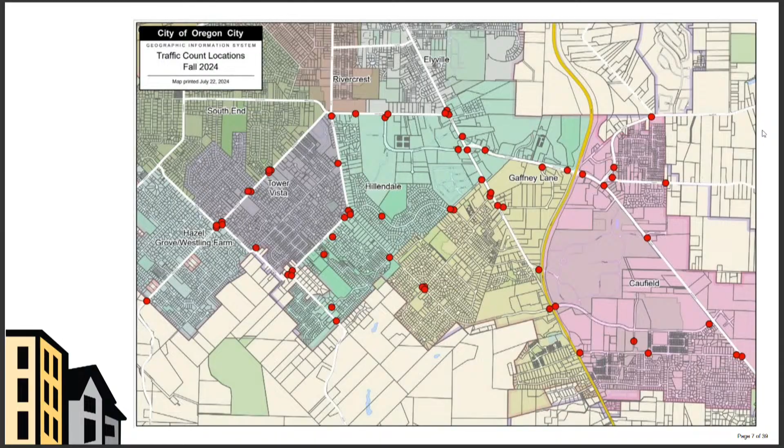Our next topic is the 20 is Plenty program. I didn't pull the long history of this program and the discussions we've had, but I did pull a summary of the June TAC meeting. John was here and shared with you some information.

So back in June, John had a discussion with the city commission, and they essentially approved moving forward to engage the community and evaluate community interest in the program. That's where John came back to you guys at your June meeting, and he shared the following suggestions.

Confirm there's full consensus of the TAC members. Confirm TAC participation in a community outreach and public education campaign if we move forward with this program.

Confirm with the police department the feasibility of enforcement of speed limits on local streets, and a review of a draft community survey. So tonight, what I wanted to share with you guys is...

I'm not sure John had this information at the last meeting, but in October of 2023, we did a community survey about the 20 is Plenty program.

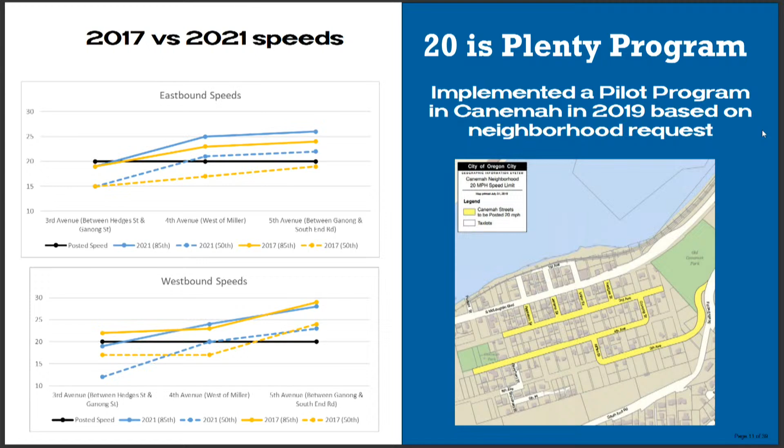I'll just make one comment about these numbers. I've seen some studies and articles about Portland's speed limit, the '20 is Plenty' reaction, and there have been two counts since Portland implemented 20 is Plenty. One of those counts came out in 2021 and another in 2023. There were some articles that came out when their first studies came out in 2021.

Oh my gosh, the speeds actually went up in 2021 — it's a little misleading because people were driving like bats out of hell throughout the pandemic, everywhere, no matter what the speed limits were. It wasn't until 2023 that we saw those average speeds go back down.

And who knows — did 20 is Plenty help with that or not? It's still up for debate, but the fact is, it's a statement of values for us. Do we value people driving at safe speeds on neighborhood streets, or don't we? Is that an expectation that we're willing to set and have the police force enforce if necessary?

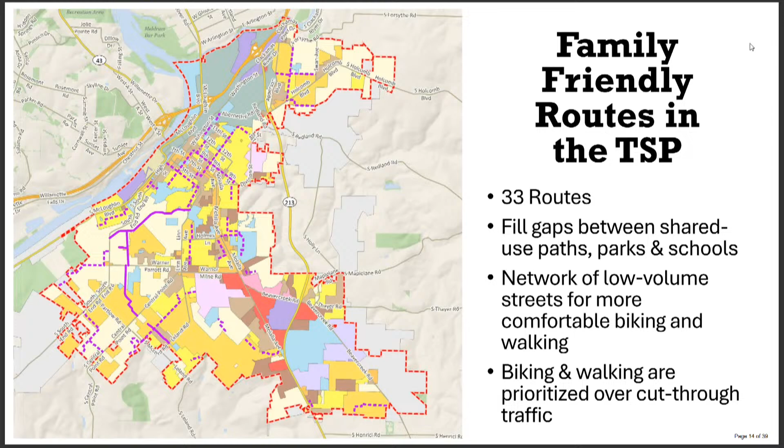So I would be hesitant to say we, and all. I'll disagree with you on that one. Okay, well, so maybe we're at the first checkbox. Yeah, sure.

I guess I'll just speak for myself. I am in favor of moving forward with an expansion. If the consensus is that we just move forward with a smaller expansion at this point, then I will support you all in that. But I just think it's an easier message, and maybe we should go down the line and see how others are feeling about it as well.

So a quick thing, we can discuss this further if everybody wants, but maybe a quick vote of people who are in favor of moving forward to investigate the program and see if there is a consensus there. Would anybody be okay with that?

I don't know if we're ready for a motion. I think we should just kind of go down the line and get a temperature as to what's Petronella feeling. I haven't heard what Henry is feeling like. I haven't heard.

Chris and Tim, you all voted for, we had a unanimous motion to recommend to City Commission that we move forward on 20 is plenty. So if we're no longer supporting that unanimous motion, then I think each of us should individually talk about why it is we're no longer supporting that.

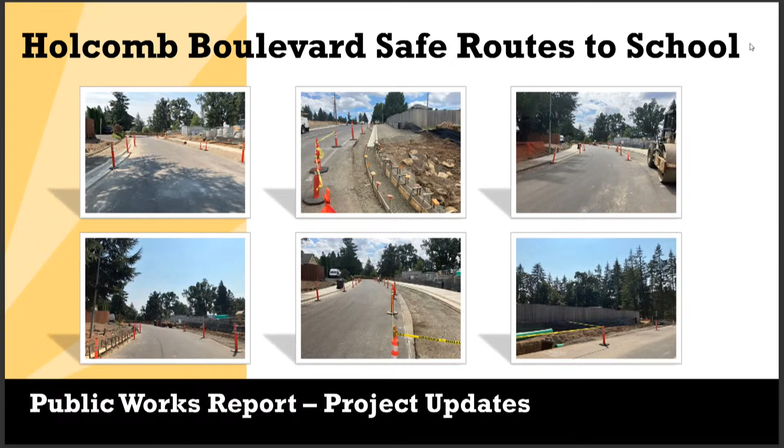Vance: On where Icon's work is going to be in the future, would it be possible to put a temporary blacktop sidewalk across that area so we could have a passageway that wasn't on the street? I just jotted that note down. Again, Henry, I'm not involved in this project. Is that the apron into the Sears project? No, just along the edge, because he presented it like there was going to be a gap in there of grass or something, and I'd like to see it as a hard surface, not permanent, just something. You got it. Perfect. Yep, duly noted, we'll have to look into it again.

My apologies that I'm covering this and don't have those details. I understand. I have a question for you on this. I know Dina will have to be the one to answer this.

We have an epidemic of gophers across this section with construction people constantly cutting the street. Originally it was planned that from the center line to the north they would replace the asphalt, but they've pretty much destroyed the center line to the south side too. They just repaved that new section, and I come back and they've cut it again all the way across the street. These people don't know where their utility lines are running - they keep cutting them, burying them, and cutting them again. Can the city enforce that when they get this all done, they put a complete layer over this so it's not like the Oregon Trail driving through there?

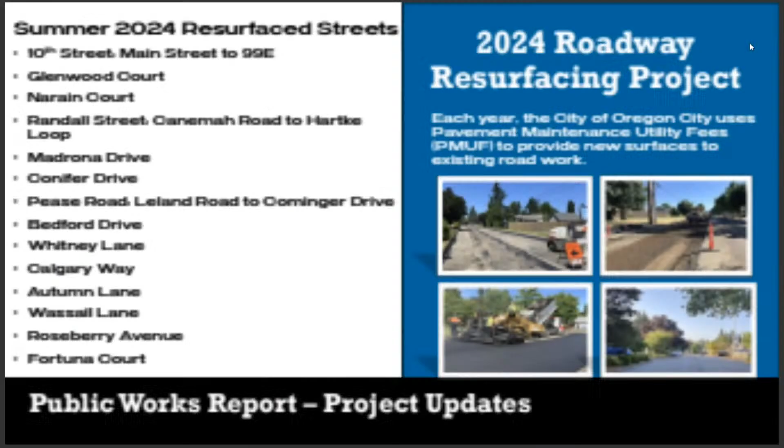Okay, these are our in-house paving projects. The ones we did here in 2024 are at the top of the graph, and the lower part of the graph is what we intend to do in 2025.

I'm very proud of my transportation crew. They get better every year. Paving is something that, like most things, you have to do with great regularity to get better. It's kind of like painting your first room - you do it a few more times and it looks a lot better.

You can see the roads we've tackled on this list. Sometimes it's not the amount of roads but the square footage or yardage and tonnage. We have limitations with the number of trucks, personnel, and the width of our machine, so that's where the private contractor comes in for larger, more technical streets. Typically in-house paving, to be mindful of budget, we avoid overlays that trigger ADA requirements for sidewalk ramp replacement, since several other paving maintenance practices trigger that. We try to target streets that don't have too many sidewalk ramps for in-house work, and leave the rest to the contracted paving program through PMUF.

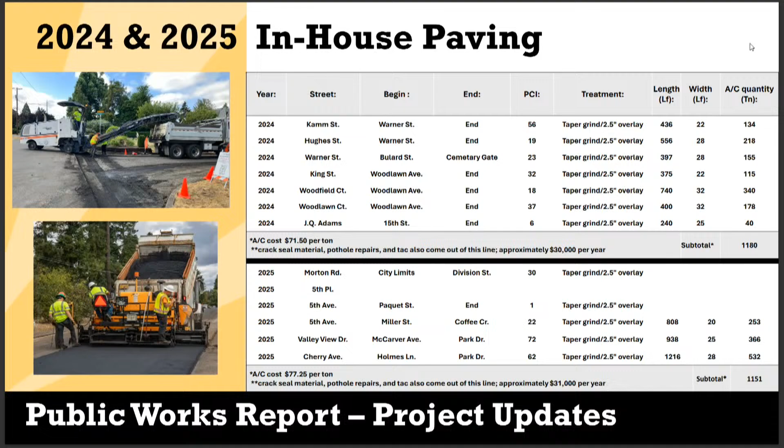So the purpose and need, you can see there, that's the official bullet point, but this all started 20 years ago with the adoption of the McLoughlin Boulevard Enhancement Plan, where we realized we had a highway through our city that was not very friendly to pedestrians, bikes, or even cars. With that adoption of the corridor plan, we've been working on different phased implementation. The first phase was in the middle part, from 10th Street to the I-205 on-ramps, and that's where you see the new trees. We added extra greenery wherever we could find a place. We worked on reducing the speed on McLoughlin Boulevard, asking how can we stop people going 55, 60 miles an hour down McLoughlin and turn it more into an arterial roadway.

The second phase was from Dunes Drive to the Gladstone Bridge, the work right in front of the Oregon City Shopping Center. Phase 3 was the most complicated section, and a couple years ago we applied for a grant to start looking at that complicated section, which involved the viaduct. A viaduct is like a bridge, but rather than spanning an opening between two known land areas, certain portions of 99E are only partially on basalt, so there are areas that are a bridge structure for about three blocks. With that 1940s viaduct, there are crumbling sidewalks, not ADA compliant, and really no ability for bikes.

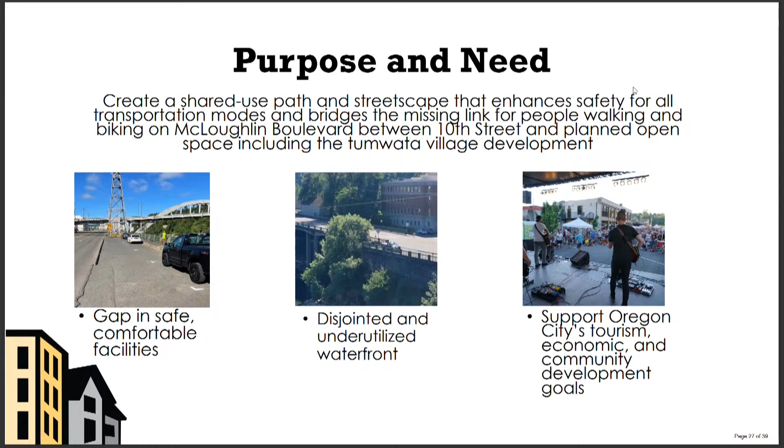So this is the project area. This is phase 3, which is either called Tunnel to 10th, referring to the railroad tunnel, or Tumwata Village to 10th. But you'll see within the boundary, it is McLoughlin Boulevard within that boxed area. The reason Main Street is added to the project area is that whenever you do a good engineering design study, you have to have a no-build option.

So as part of this process, what happens if there is not an option for pedestrians and bikes to safely get along the Willamette River? Then the no-build option would be directing bikes and pedestrians to cross probably at 10th and utilize Main Street as their way through. That would mean sending bikes through sharrows on Main Street and redirecting folks to walk south through Main Street, and really not changing the existing condition of the riverside of the viaduct.

So as part of the planning process this last year, our design team came up with a lot of different options for pedestrian structures on the river. One thing we heard from ODOT is that we could not attach anything onto the structure because of the age of the 1940s viaduct. So anything that was built would have to be its own independently structurally supported structure. You couldn't just put a little add-on and have a pedestrian path.

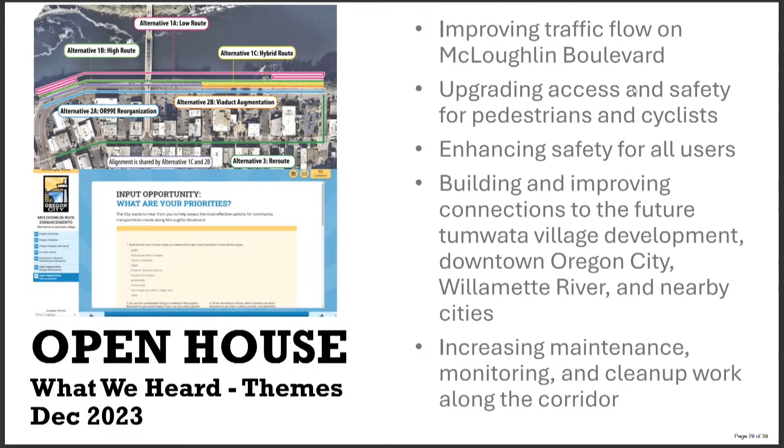And really, the first two phases are done, and this phase has definitely shown what happens when you have an existing condition that hasn't been changed over the years. So we definitely heard that. We sent all that information to our design team, and they started looking at all the alternatives, and pretty quickly they realized that none of the alternatives could structurally be built.

I'll try to talk a little bit about why, and also be permittable. Two options came out of those conversations that were not in the public open house. The design team and the bridge engineers looked at what could be built, as they pushed back and had conversations with our permitting agencies and ODOT, which owns the infrastructure.

One is the conventional viaduct with 2 signature spans. The other was the long span. So the long span is what kind of bubbled up out of the process, really the only viable alternative. I'll talk through their analysis of how they came to that.

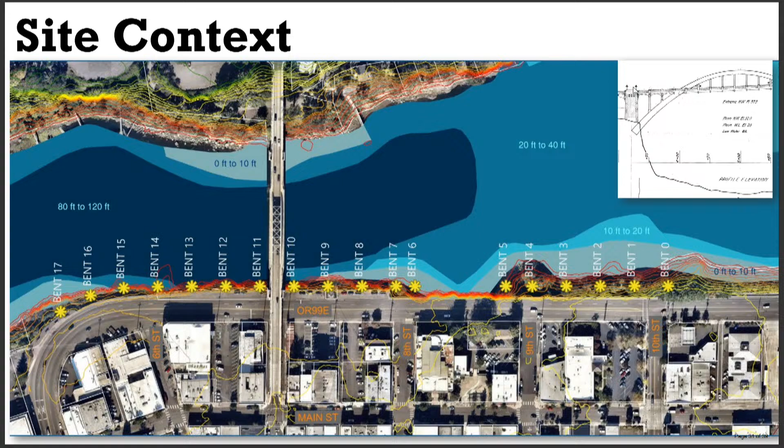If you look back at the historic arch bridge, you'll see on the top right there are 2 arches, or posts, that fall below the deck of the arch bridge. The path would be at the one not closest to the pillar, but the next one over - because you need that distance for ODOT to look at the viaduct. So this is the long span.

This is really some of the advantages. It minimizes those foundations, so it really reduces the unknowns of a foundation excavation along a shoreline in Oregon City. It's a pretty light and shallow superstructure, so the bridge deck is a pretty standard bridge deck that they could thread through.

The maximum clearance below deck, the lowest point would be a little bit lower than 99E, kind of right underneath the arch bridge, and then on both sides you kind of make your way back up to street level at 99E.

They said it's pretty prefabricated. You can work in the dry area, so you're not doing lots of in-water work, which greatly adds complexity to a project.

It's a contemporary solution, intentionally different than the arch bridge. There's always a question of how best can we design one of these to not adversely affect our historic arch bridge. There may be nothing that can be built that doesn't adversely affect it in a historic way, but this is kind of all the alternative analysis, this is the best option to have the least amount of impact through the arch bridge. So the challenge is, it's always complicated to span through a 1920s bridge.

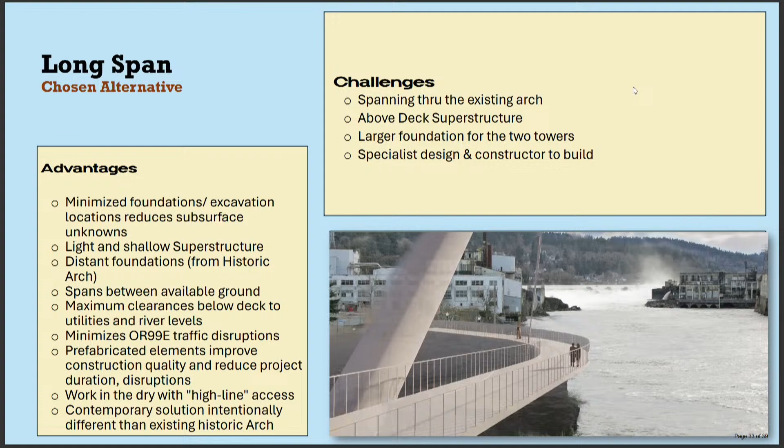So the other piece of this whole plan is the placemaking aspect of the streetscape design, the non-structural part of 99E. This is the non-pedestrian bridge part. There are a lot of opportunities to create more green area. Could there be a linear park, landscaping, benches? Are there community space opportunities? This is just an example of a project that showed how you can take an existing roadway and turn it into a linear park. It's not exactly the same, but it gives you an idea of how you could reclaim space.

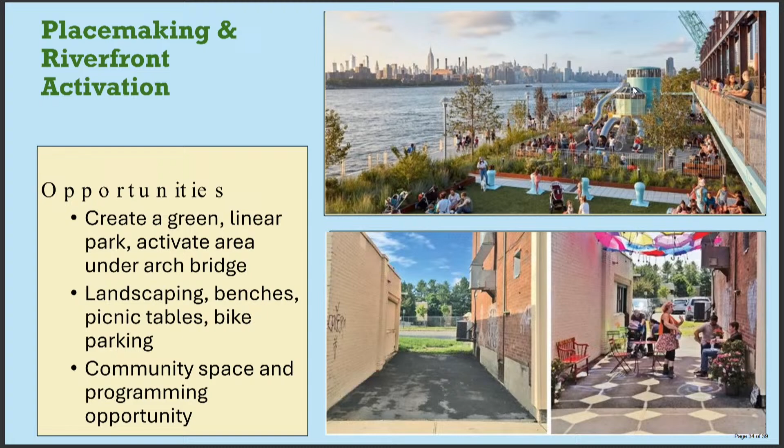At the bottom, I thought was a great one - this is just an alley that you can repurpose. I'll show you that as it relates to the area under the arch bridge on the city side, as you move from 99E to Main Street. There's also some underutilized areas under the arch bridge there.

So the streetscape below, you'll see this is our existing condition in our phase 1. You can add more bulb outs, landmarks, lighting, wayfinding. We can change materials, add landscaping. We can have art, interpretive signage.

One thing we've been working with, and you'll see in your pack, is with ODOT, really trying to reclaim any underutilized space in this section of McLoughlin Boulevard. This is a freight corridor with specific requirements for width and dimensions, but what's left? What do we have to work with in the outer area, and what can we do with it? We've heard from the community that we want to keep as much parking as we can, so with that understanding, what can we do?

I want to walk through the slides as we go from the southern end at the tunnel, and work our way north to 10th Street. There were 3 areas that the design team identified where we think we could add additional open space or keep as parking. One nice thing about being at a conceptual level with a corridor plan is we can adopt both, because we don't have to make that hard choice today.

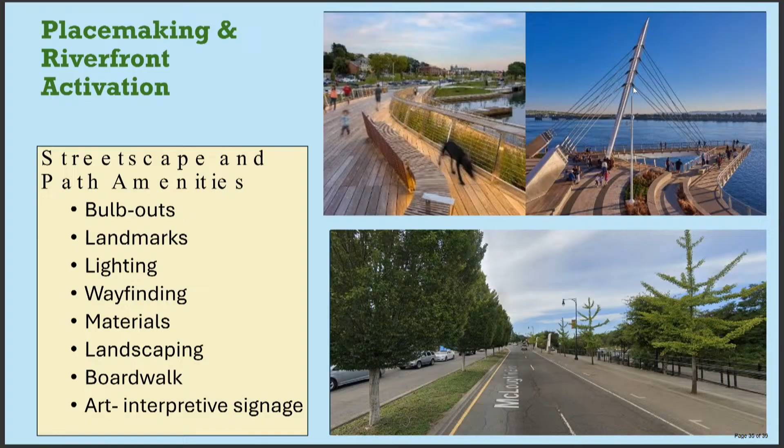So essentially, one end, and then one in the middle. And actually one more thing I didn't talk about - one thing the commission really wanted, and it's not shown on this version because this was that first pretty version, but there really was a desire to have an additional pedestrian crossing at 8th Street.

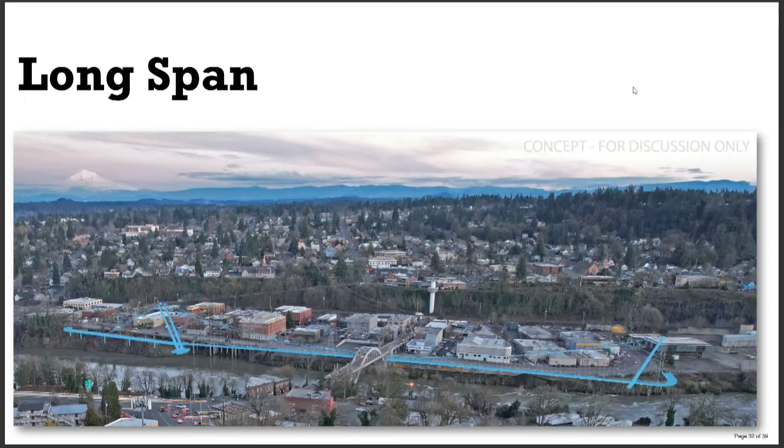And really looking at a potential under-viaduct crossing. The latest version, which will come out and they're still working the mock-ups on, the commission saw variations of - if you look at it, it's really close to where you would go down the street today for those steps down to the 8th Street dock, in that area between the Clackamas County Courthouse and the viaduct. Where the existing stairs are, it would basically be turning that into an ADA pedestrian ramp that would run underneath the viaduct and connect.

They're still working on it - it took a while to look at the design because you're chasing grade, and that's always longer than people think, to chase grade to meet ADA slopes. But that is the goal, to have the ability to walk underneath at 8th Street and head back. So really you have the connection at 10th, 8th, 7th, and then you really do have to wait till you get to Water Street at Tumwata Village, because of that section where you really don't have any opportunities to connect at the elbow. So thank you.

There's a lot of moving parts for this project, but that is a slide that the commission really wanted to see. Having another pedestrian-activated beacon, they thought would affect the AM and PM peak traffic. So that is the balance - it is still a highway. And so they really wanted to look for that under-crossing.

So I have a question - is there a commitment from the tribe to develop that area? Tumwata Village, the former Blue Heron Paper Mill, the Confederated Tribes of Grand Ronde is looking at updating their master plan and turning it in this fall or winter.

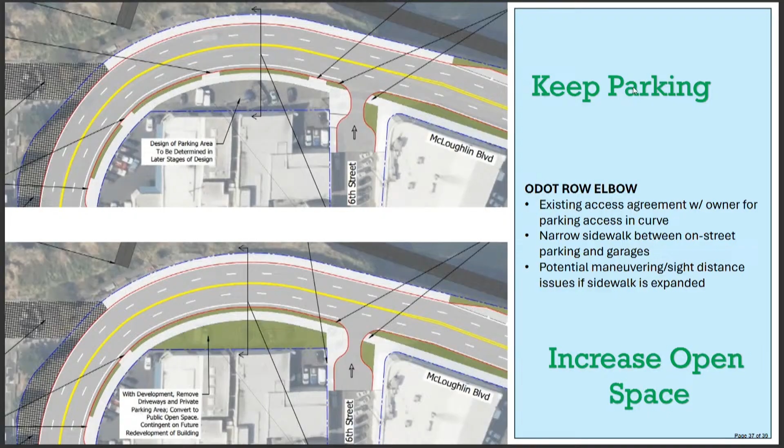So they'll be bringing back Water Street in that right of way, with a new right-in, right-out connection into Water Street, and a new 4th Street. 99E in this section is actually 5th Street - as you turn the corner, that little section is 5th. So behind that will be a new 4th Street, and the Tumwata Village will be building a new loop in these early phases: a new Water Street, a new 4th Street, and then a loop back onto Main Street.

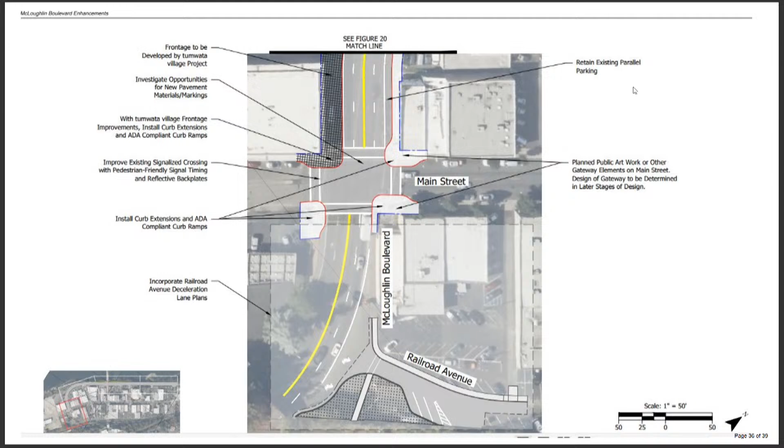In addition, where you did the greenery in the north section of McLoughlin, is that going to continue? Where we can, yes. It's really just a math game of where there's area, because as a freight route with pinch points there's a certain dimension, and where there's room we'll put a median. Some medians will be wide enough to have vegetation, and some are too skinny, so it might be a rock median.

That level of detail really isn't set at the conceptual phase. ODOT has a kind of standard practice of when you get to it, you'll determine this type of median or that type.

This area has less opportunity for medians, though there will either be a right-in, right-out at the Water Street curve, or a center median where you can't turn. You'll only be able to get right-in, right-out at that Water Street for safety reasons - you wouldn't want people turning left. So we're still working on the design approach, but there's less opportunity for medians in the middle because of the right-of-way span in this section, though there are some opportunities around that bend.

There will be street trees as part of all of McLoughlin Boulevard. The city maintains street trees where we're allowed to put them in - it's still an ODOT facility, but it's something we maintain because it's a value we have as a city to have street trees along this area. We'll work with ODOT on the details of where each street tree could go, but it's something the city will own and maintain.